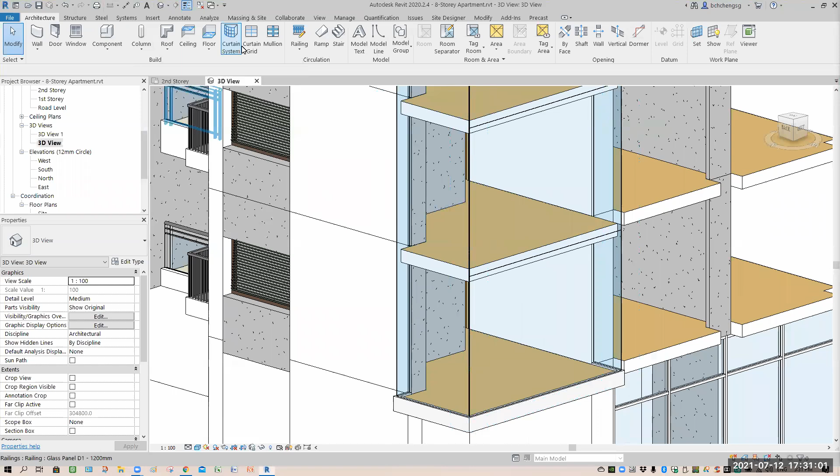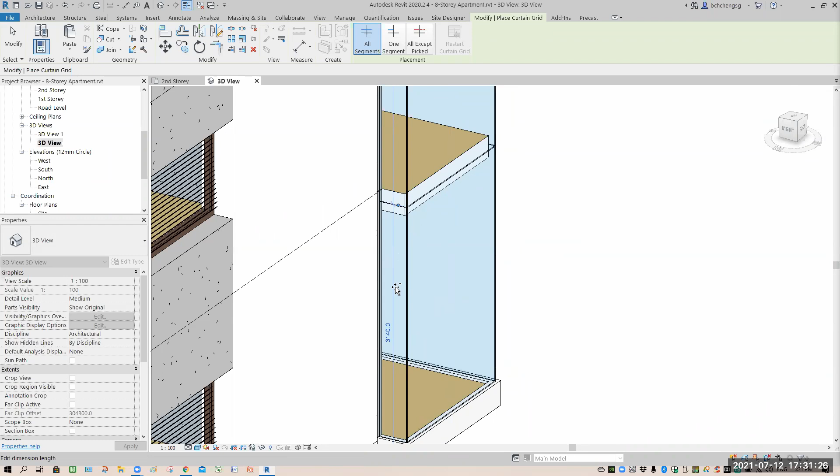Curtain grid, see that? You're able to see the value. See when you start to split. They can track correctly at times, but if they can't, you can see. So 3140 done, then the other side. Careful—if cannot, you orbit your view here. So here 3140. If not, randomly you just change. You automatically adjust, like that.

See 3140, the rest is 3 meter. Always press single escape to clear the dimension away. Sometimes we may be able to track the other side. See 3000, then you orbit again.

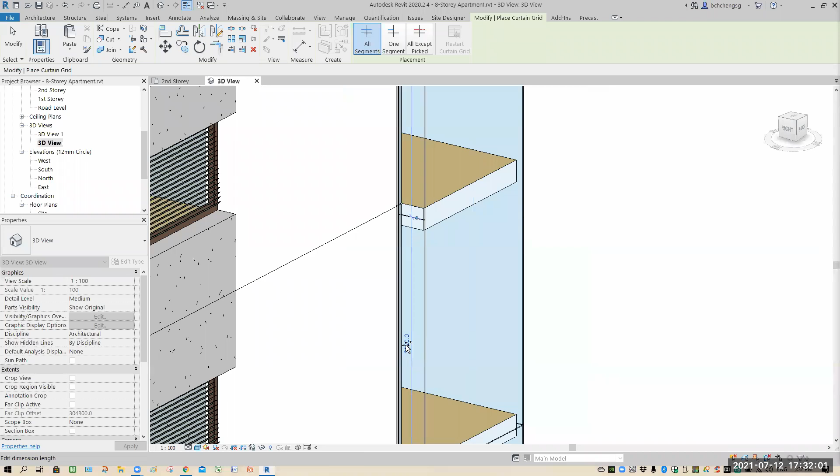It's a bit tedious sometimes, but you are learning to understand. So 3 meter—now 3 meter or 302, wrong, you can change. Don't worry, okay, change the value to 3000. Okay, single escape.

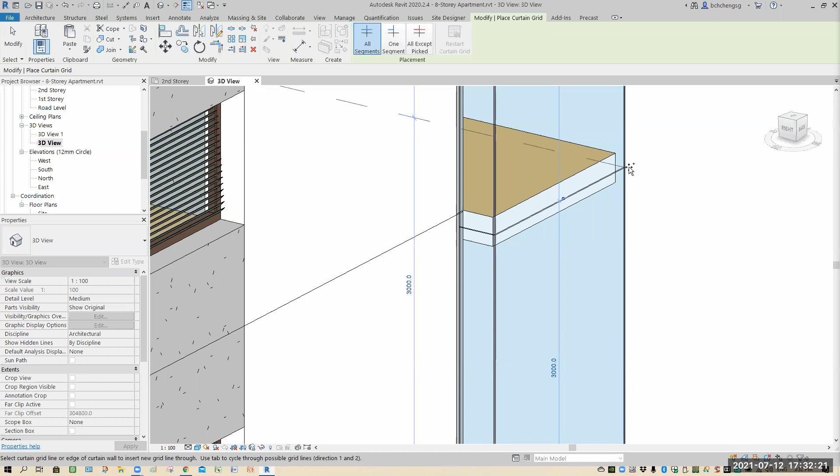So you touch the glass, it should appear. If not, try to adjust a bit. 3000, that side. 3000, come on. 3000, shift key, orbit to the side.

Okay, so slowly you build your way up. I just want to show you the basics first; the rest should be the same. The last floor might also be different because of the slab shown on top, but in between, your floors 7, 6, 5, 4, 3 should be the same. Only this one and the top are different, because the way it's been kept nicely.

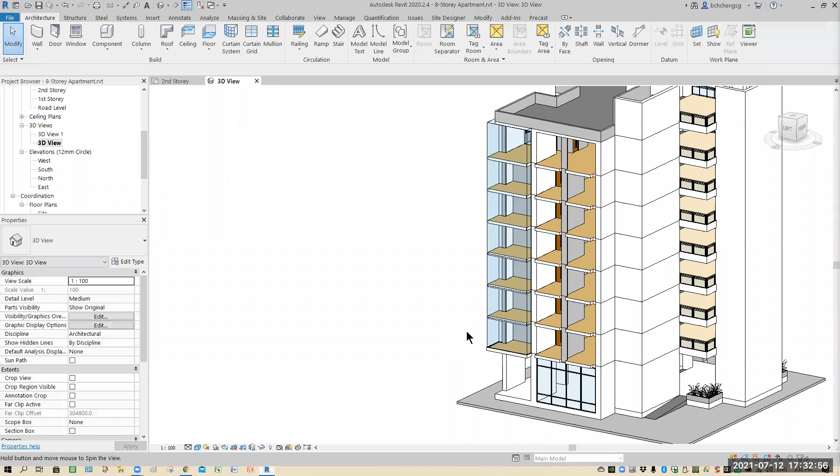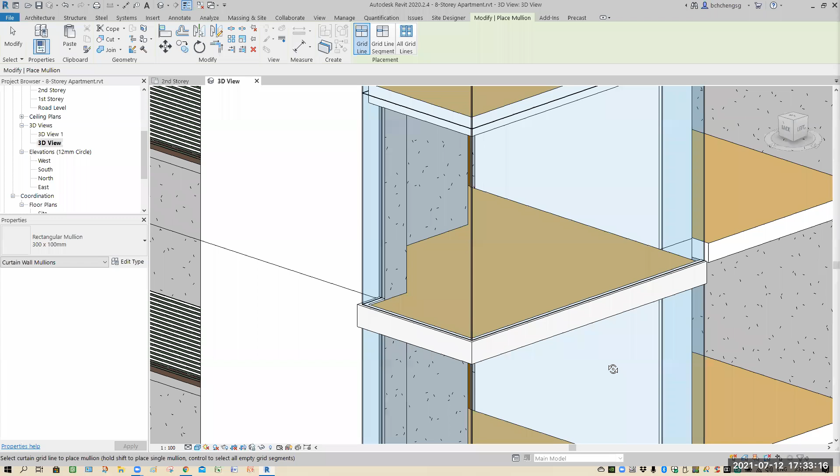Okay, so now roughly we have—you select one of the mullions, right click, create similar, then you just pick on it. Make sure it's highlighted. You can just choose, yeah, like that. I show you the first few pieces, the rest you guys will follow. So you can see that they connect nicely.

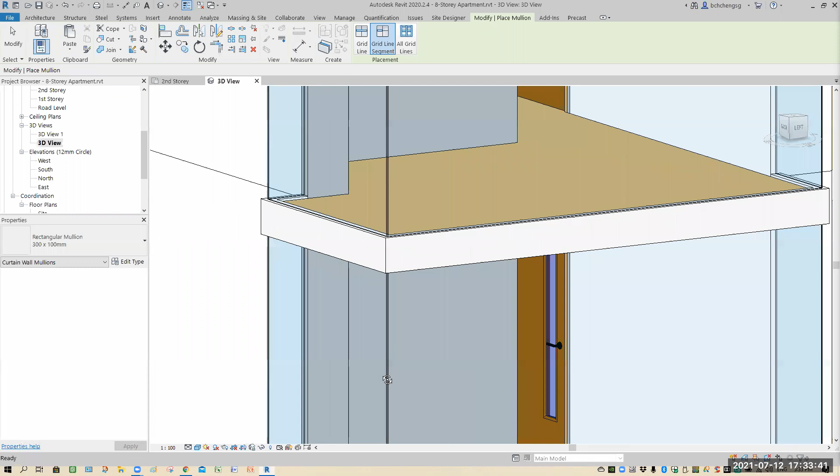All right, let's look at here. Nicely even split out—see now, you should have a capping like this. Or you want to set it higher, up to you. I'm okay with it, need not follow my specification. Your design should be your own, as long as you have something to stop it. Of course, if you roll it hard, you will definitely break the glass.

Okay, so at least the horizontal mullion is done. Now is the vertical mullion. Well, this is also another challenging one.

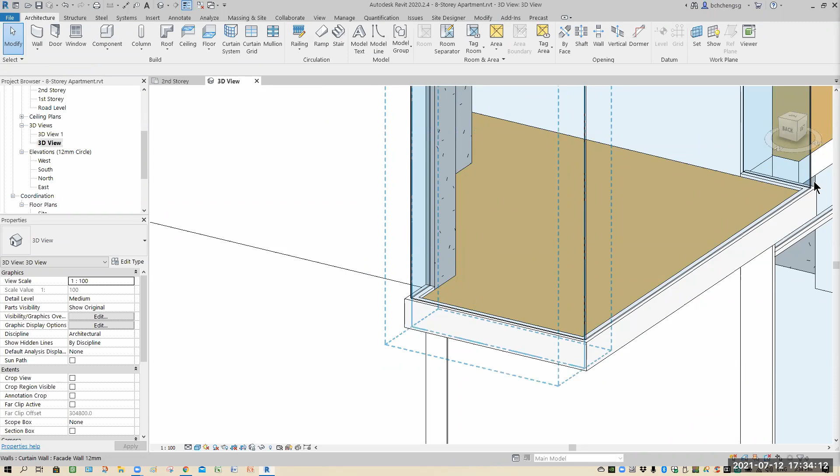Okay, how to get the vertical mullion? I would like to have this break into two. Why? Because at this corner here, I don't want to place any mullion—no, all the corners with mullion is super ugly.

Comes to the design—so when it comes to here for splitting the curtain grid, I'll see some distance. Where can I split? Where's the dimension? Oh, it's on top, because normally roughly it shows you in between.

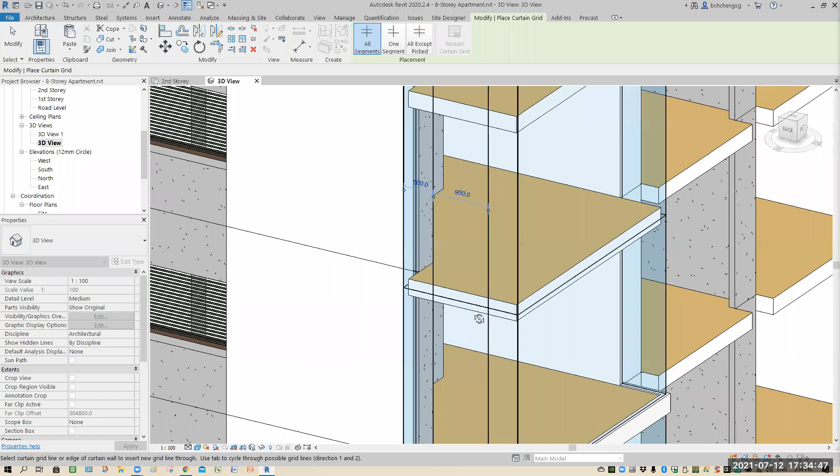So you may want to design this. Let's say 500. Adjust, change the value to 500. So this is a 950 glass. Is it too big? If too big, then you change it—maybe set this to 600.

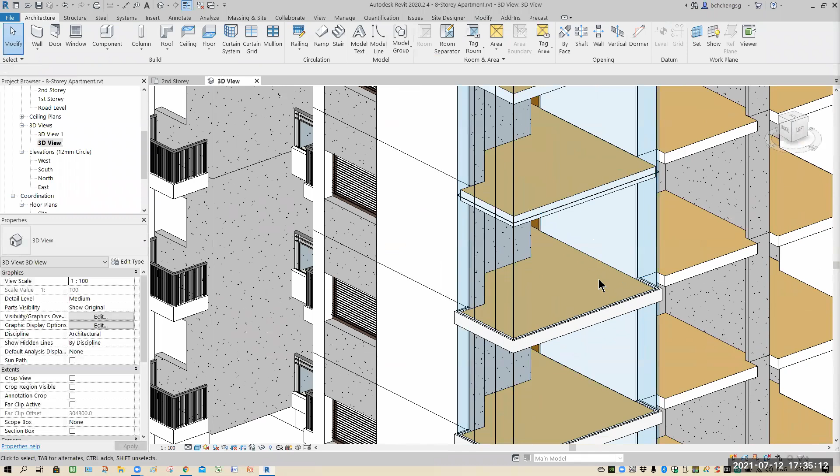So this grid here, 600. All right, all this I leave it to you to change, to design. So this one I've got two vertical supports already. Now here, how to do this support?

Maybe I'll split into 4 pieces. If 4 pieces is super ugly, then you widen your mullion support. Let's see how we can do this. Okay, because this is the selling point of the design—if you can get something nice on the connections, people will love it. Agree or not? You break it into 2 small pieces of glass,

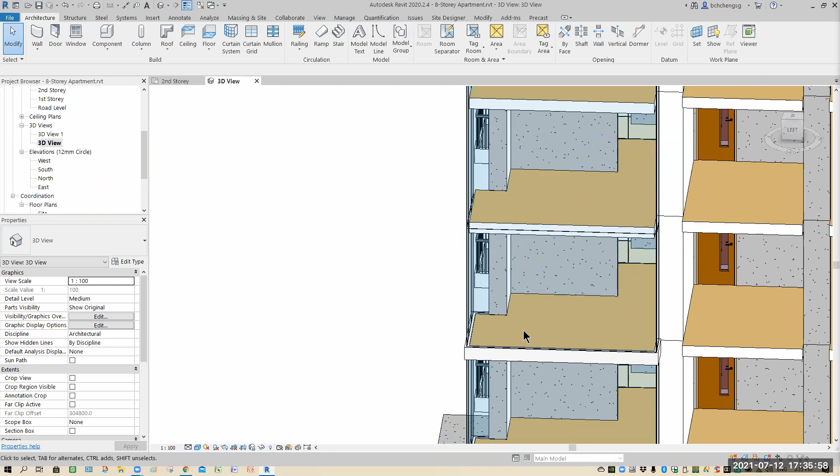you're like in a jailbird because of too many vertical trusses. All right, so the main support here is one thing, but this is about how to lay a single glass pane—no way, right? Yeah, okay, so you may want to think about how you design this.

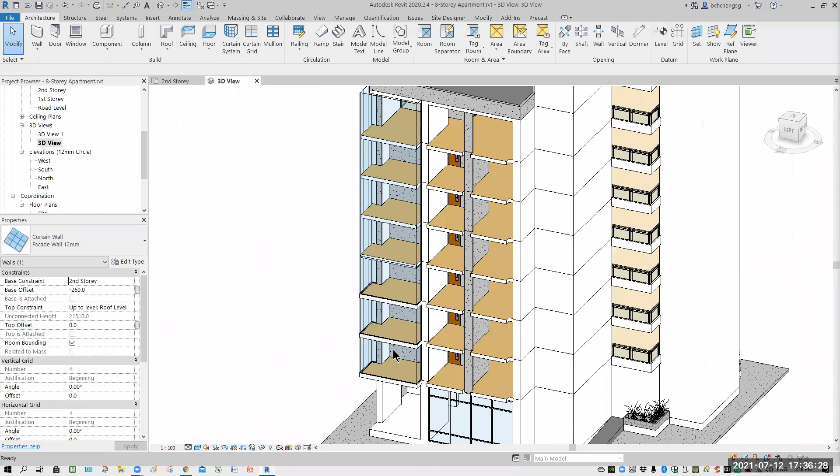So this piece is how—what's the distance? Hold on, it's around 3850, around 4 meters. 4 meters, I think 1 meter by 1 meter should be quite alright. Okay, so it's quite a big piece of glass. So let's say I want to break in the center—curtain grid somewhere in the center—so I can see where my tracking dimension is.

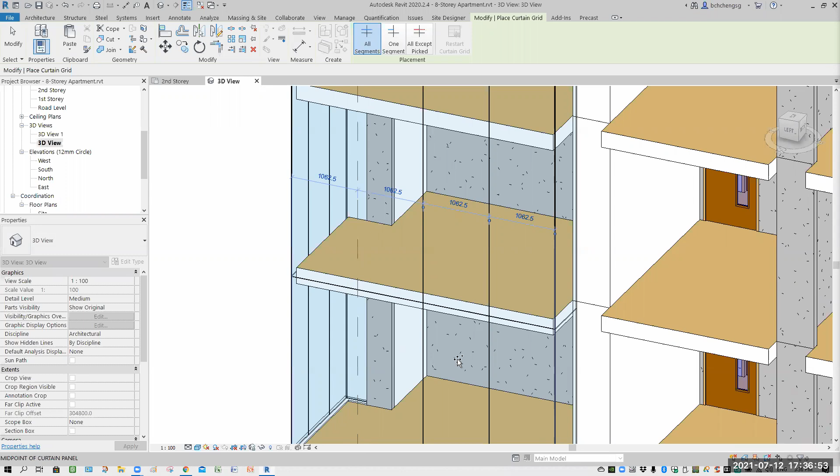Come on, 2125. Okay, I think this is good. Escape. Yeah, 4 pieces or 3 pieces. Yeah, this is good. So this one no need lah. All right, only this 3 piece. So this is almost a meter, quite big really.

Okay, so those that is vertically trussed up, how to get the connections. Okay, the mullion, which is thickness is 100. I want to make this guy unique a bit. The width is bigger than 100 because I want it to be partially inside the wall. So it also acts as a mounting, supporting vertical truss.

So all these are loading, sharing. All right. Then the width is not 300, all right, I mean the height. Okay, so you need to understand this value here.

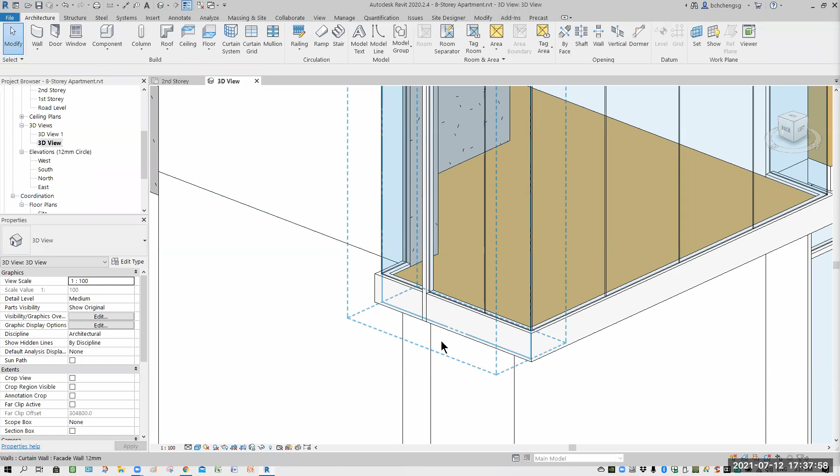If I'm going to select something similar from here, then we modify. Maybe I'll select this piece. Add in first one piece. Okay, I'll see how it works on this. See, flush ugly. Here, I like to change. Edit.

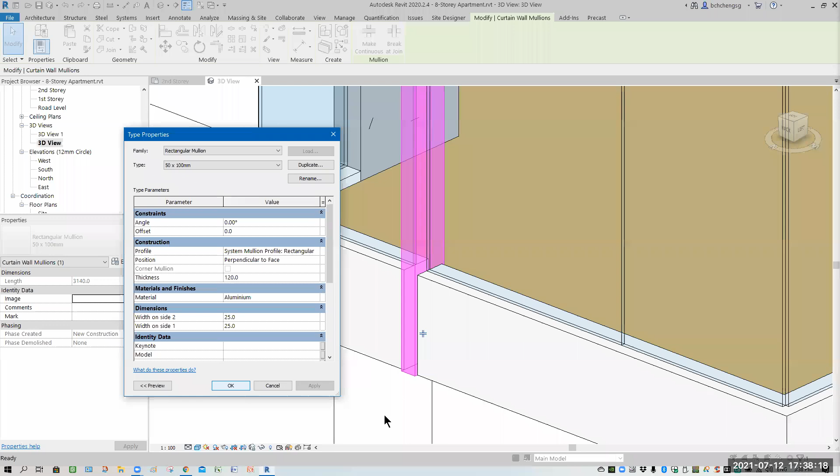If I change this depth here, 100 to 120, see how it looks like. Is it nicer that way?

People say what, Chinese? 有层次. You see there is some, what you call that?

Yeah, I did record already. Peng Hui, what did record already? There's some earlier part I forget.

So this part here, this looks nice in this case. See that? You can see some different, what's the term? 层次. You guys help me to translate. Different kind of perspective, or there's some... what's the word? Let me think about it.

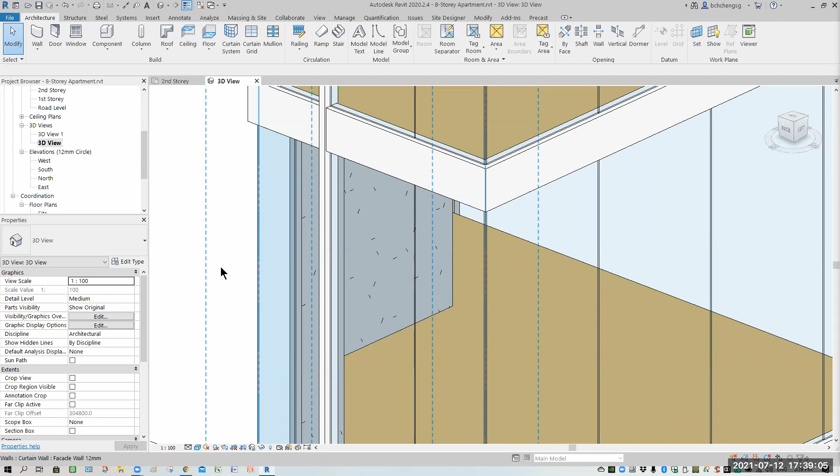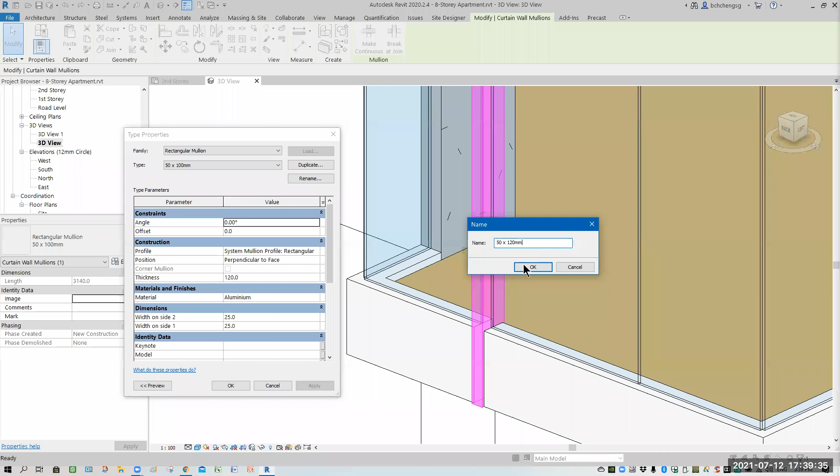So this one here, I will change the mullion. Then maybe I think it should be good lah. Okay, so this I will duplicate, set this to 120 mm. You guys may want to change, if 50 mm is not so fantastic, then change lah. 50 mm I think is okay lah. The thickness, hopefully, so it is 120.

Okay, so I want this style of design. At least not so boring in this case. Yeah, so one more here.

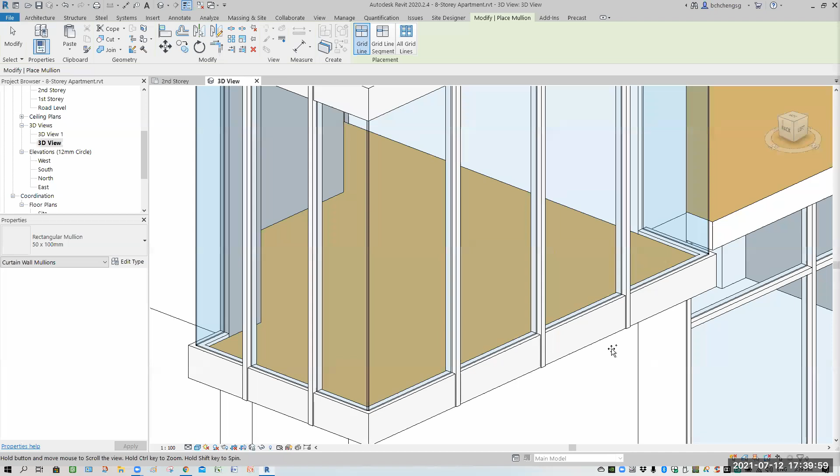Right, now for this, because this glass is a bigger piece, let's see will it fare nicer, or you want something that's thicker? I don't know. Yeah, looks okay, huh? All right.

Now in between here, you need one also. Yes, but is this the design you want? Let's think about it. Okay, later.

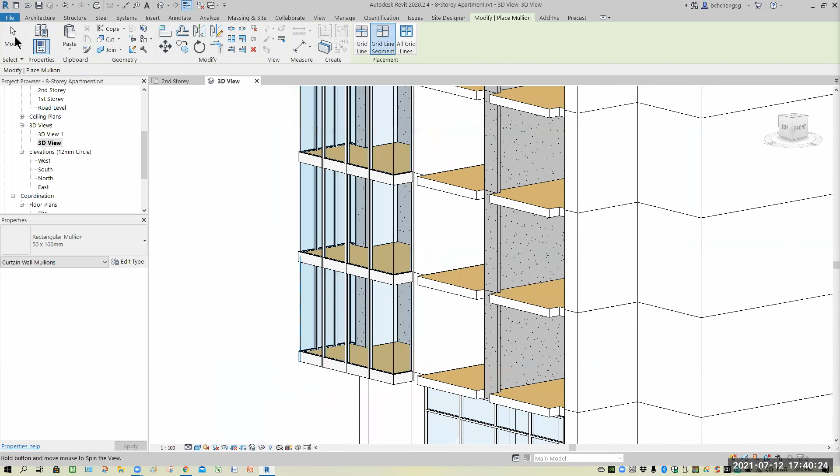Like that, okay. Of course, it's still not enough. Why? What is your drop ceiling? You must have another piece across so that you cover your false ceiling. This one here, I let you guys go and divide. You design yourself. But I already show you a head start how this can be built.

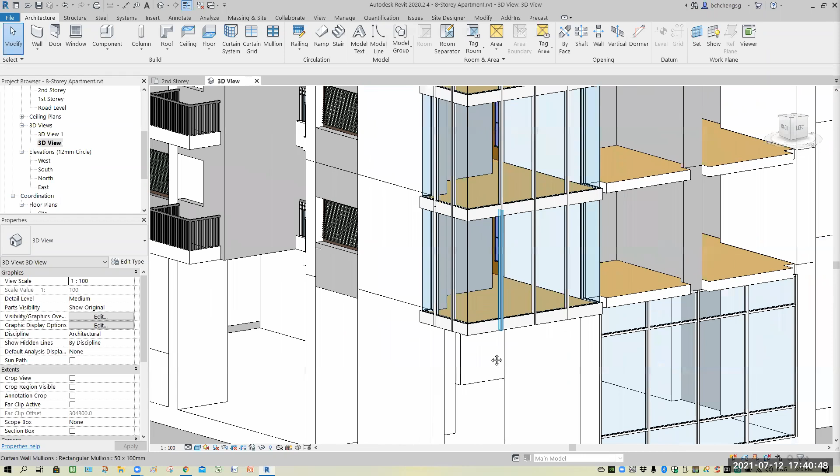So every this, because this floor height may be a bit different, so you need to add your ceiling. Once you add your ceiling, then you can decide.

Okay, so far any questions? As I say, I will not try to spoon feed you everything. I want you all to explore and understand. Okay, but of course...

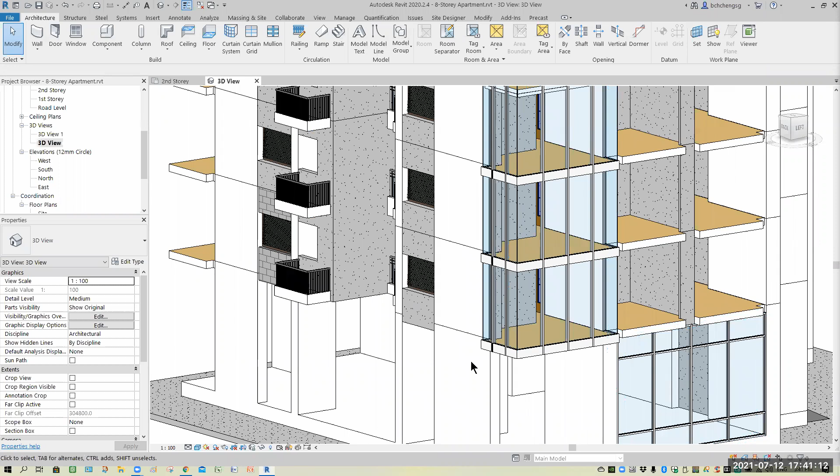Yes, you need to do a walkthrough because we're supposed to do on your assignment one, but because time's not permitted, that's why I say if you want, you need to do a walkthrough. I want you to design with a nice material. Then you do a walkthrough.

You need to do on this assignment. Day and night, up to you. If you know, please go ahead. But I will show you in a certain way lah how this thing can be done.

All right, but of course, sometimes we try to render through Zoom. I will not try. I don't want to do it on Zoom unless I can see you guys face to face in the company—I mean, in the school—then we can render. All right, unless the other thing is how you place other ceiling and so on.

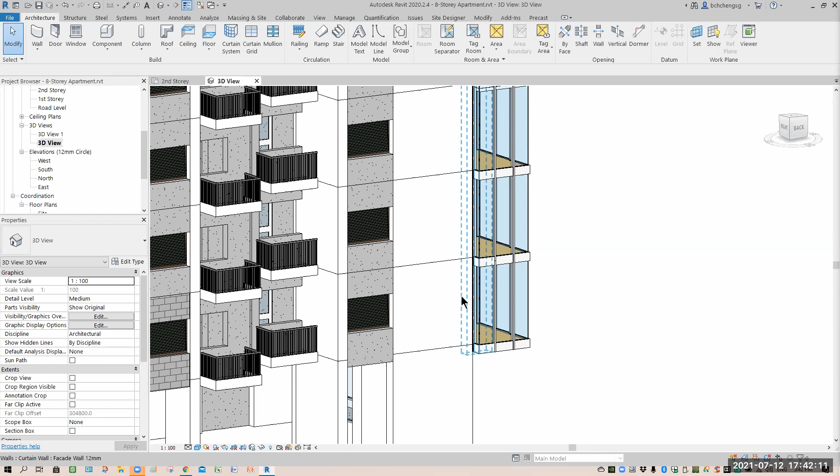Then we'll talk about it further. Okay, but meantime, that one come later. But again,

All right, remember to do horizontal panel. Why two horizontal panel? Because here I want to treat it in a way that there's a height, which is to show fixed glass. Because sometimes in certain level, this window here, you need to have fireman access. So some piece maybe in this corner, you mark as a red triangle, so anything fire, fireman can enter through that.

But I think it's a random floor, like 3, 6... I think 3 or 4. Don't know how, what's the meter, 8 meter apart I believe. Then you need to have access, if not wrong. So when you design facade, remember all this.

So you all go to Emporium, go to shopping mall, right? Sometimes you walk outside the building, you see that how come some glass area marked as a red triangle? That is for fireman access, in case internally all cannot block up, they got to go through exterior, the facade, to enter.

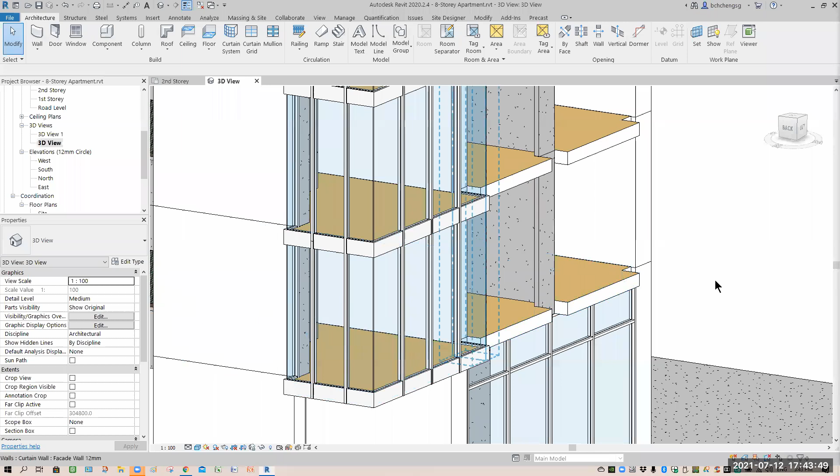Okay, so you need to do that in certain way. That means some part here you need to convert to window. So the window, that means here I got to break, right? So when I split them, although I tell you guys do your own, I still like to show you. So mullion, I use this 50/100.

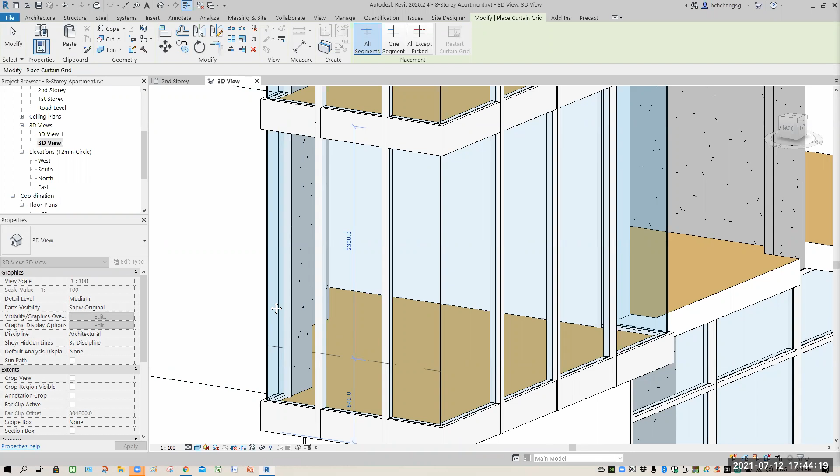The height is around... sorry not this, place mullion is curtain grid. You give around 800 to 900, should be good. Yeah maybe 850 or 900. Sorry, this 900 is too low.

Because we got to include this, I mean exclude this away. This is like 200 plus, right? So 200 plus, this height should be around 1 meter. That means minus 200 plus is looks okay. I think 900 should be alright. Ayo, me and my hand, so eager to type.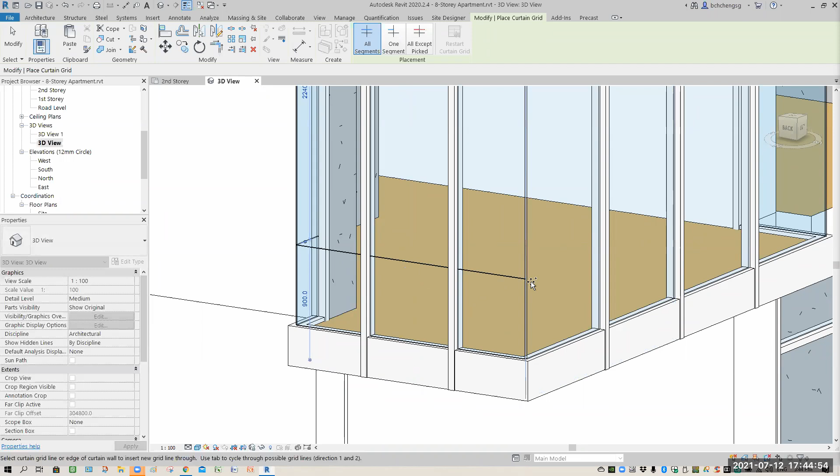Okay, so let's say 900. You split this 900. Sometimes you can track nicely for you, move your mouse, then you adjust it. Okay, the other way around.

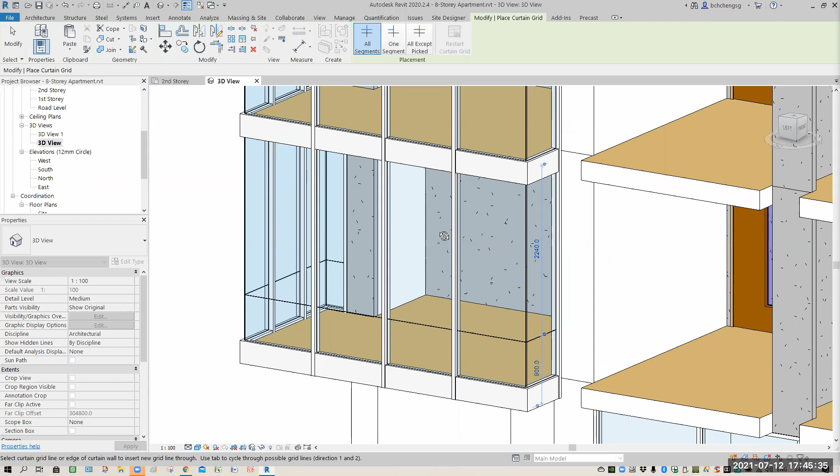So this one here, you guys determine. Once you add your ceiling, then you break accordingly. So your panel, make sure you're able to block your ceiling. Then on top piece, you can change to sandblast because you don't want things to be seen inside. So the design here is what is the height involved.

So you got to base it on the plan, what is the aircon system that you're going to fix here. The cassette, or our normal aircon, call it fan coil. You get what I mean? Yeah, so you guys got to plan.

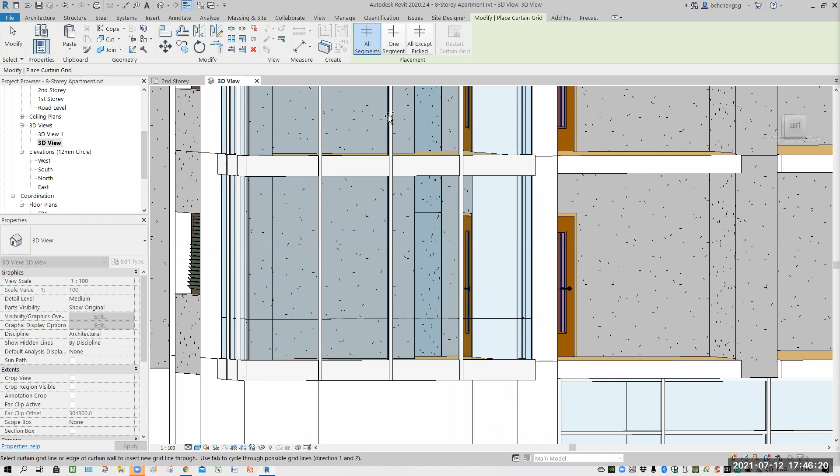Although we're not going to add the aircon system, I don't think you want to add a cassette aircon, because those cassette aircon like Daikin - I think so far only Daikin have it - then you know my ceiling drop here needs a gap of at least minimum 600mm.

So I don't think we need that, because this house here, you can see the unit. I can have a fan coil one here, I can have fan coil here. So 1, 2, 3, 4. If this one, you can actually supply here or below. Of course the laying of all this is important, because this is the big area, so it depends on the BTU, what's the power. Sometimes may need 3, one here or one here, depends if they share the same piping.

Okay, so adjust the height, think how you want to plan it. If you are using downlight, minimum your ceiling must drop 200. So you can have 200, 250, 300, up to you. You guys go decide how you want to plan.